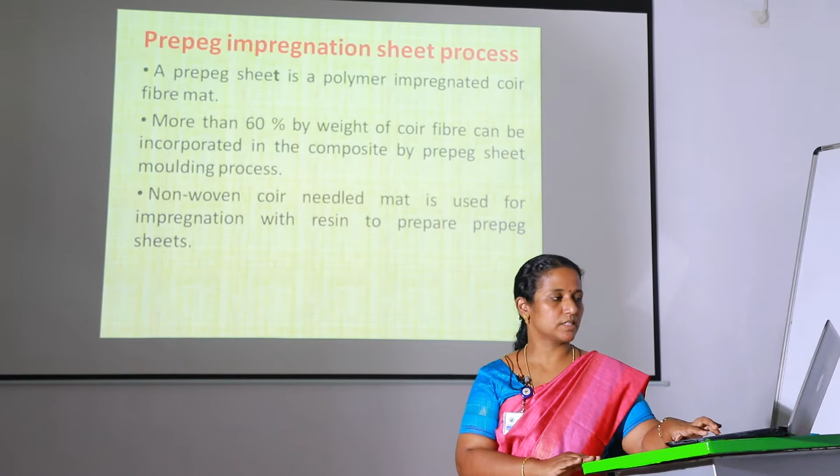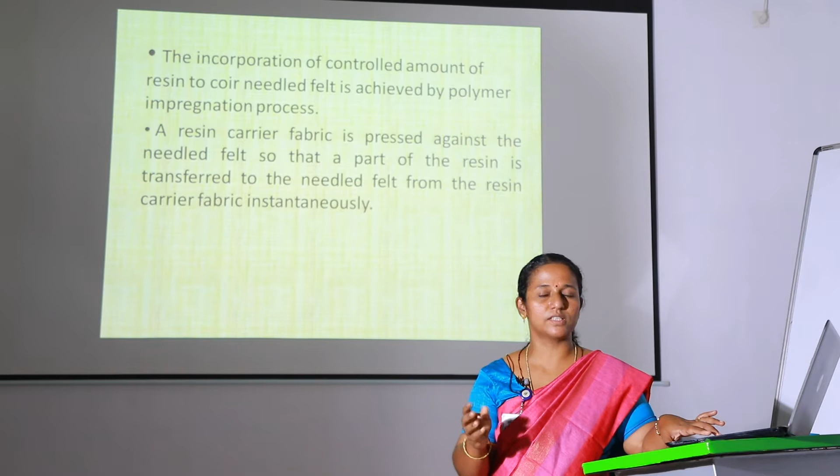By this technology, we will use only the required quantity of the resin for the wood production. That is the beauty of this prepreg impregnation technology. Only the required quantity of the resin will be laminated or coated onto the coir fabric.

The picture shows the prepreg impregnation process. We can see on the left hand side the coir needle felt coming in roll form, and these sheets are fed through 2 feed rollers and come to 2 sets of squeeze rollers. One set of the squeeze rollers is connected with a resin carrier fabric that is dipped in the resin bath. The resin will be kept in the resin bath.

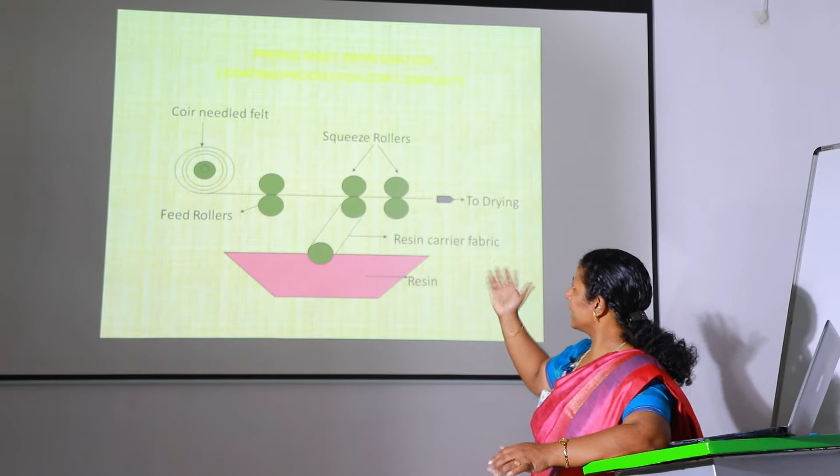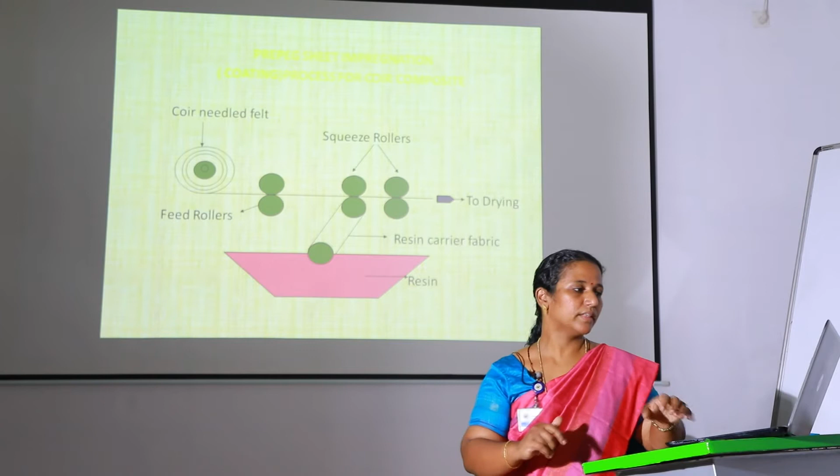This fabric will move through these rolls, and the required quantity of the resin will come with the resin carrier fabric, and this carrier fabric will come in contact with the coir needle felt while passing through the squeeze rollers, and the excess resin will be squeezed out. After this squeezing process, it will go to the pre-drying stage. Then the liquid part will be evaporated, and these sheets can be converted into the wood form.

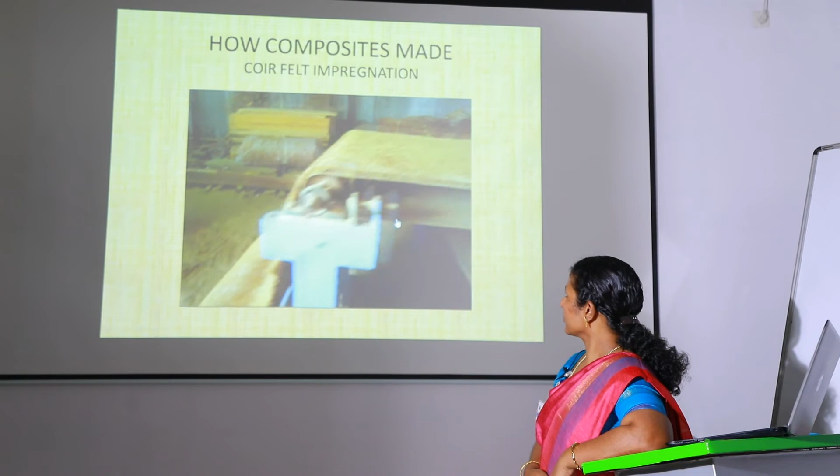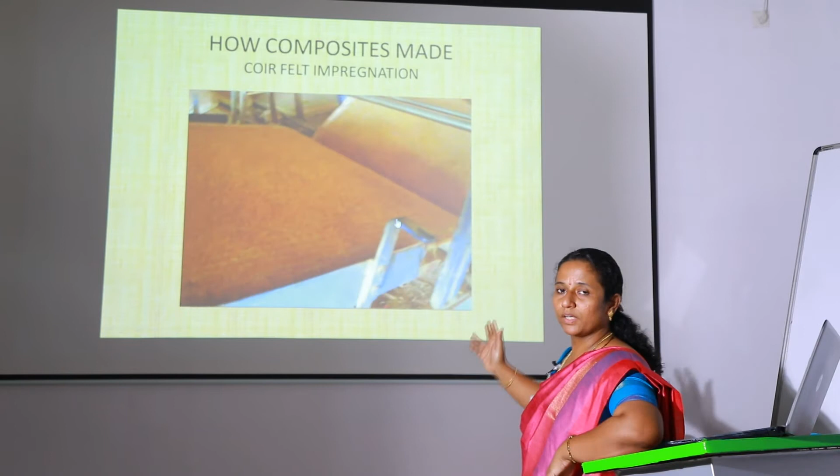The video shows the how composites made coir felt impregnation process. We can see that the needle felt materials are unrolled. It is passed between 2 squeeze rollers. It is connected with the carrier fabric. Now the coir needle felt has been coated with the required quantity of the phenol formaldehyde resin. It is the coated fabric.

Now we are moving to the hot pressing. The prepreg sheets are cut into the required size. Depending upon our requirements, we can cut them into the required size and stack them one over the other. The number of layers is decided by the requirement of thickness and density.

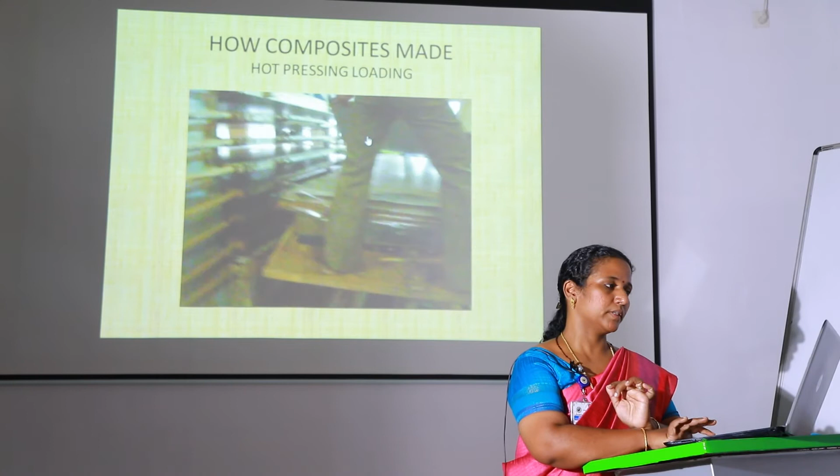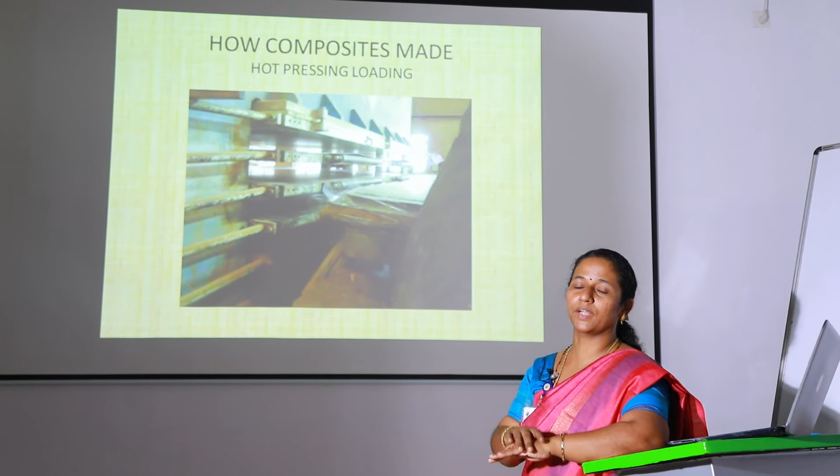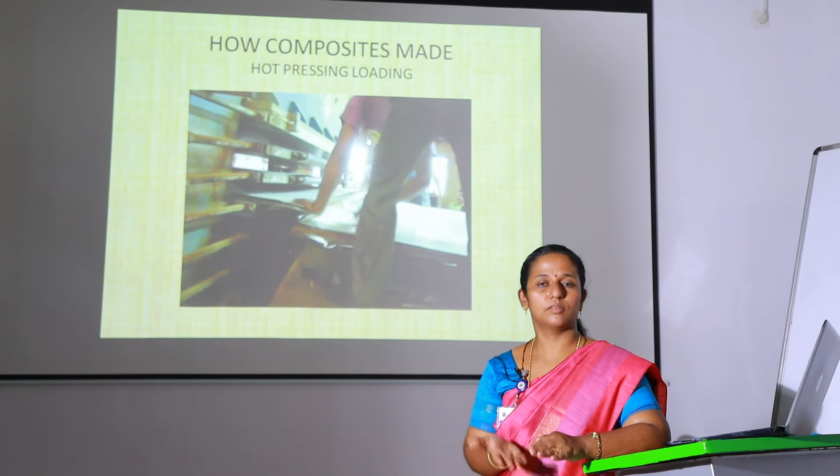Now it is the hot press loading method. The coated materials are loaded onto the hot press, a compression molding press. We are loading the required number of sheets. We can use a multiple daylight press for better economy.

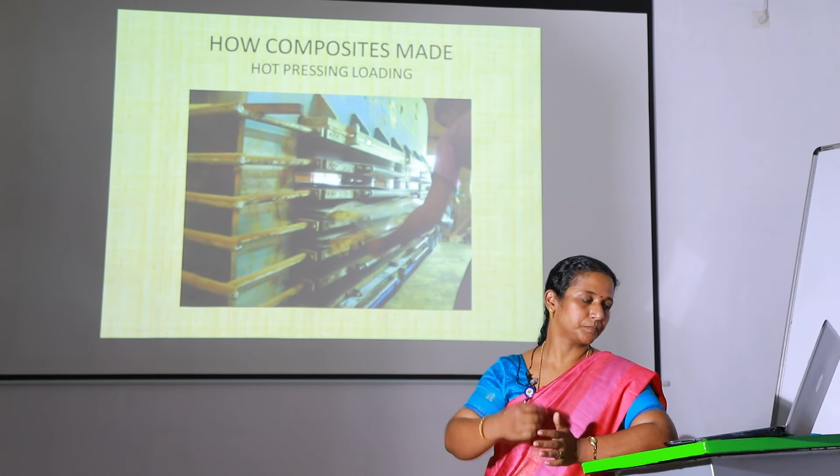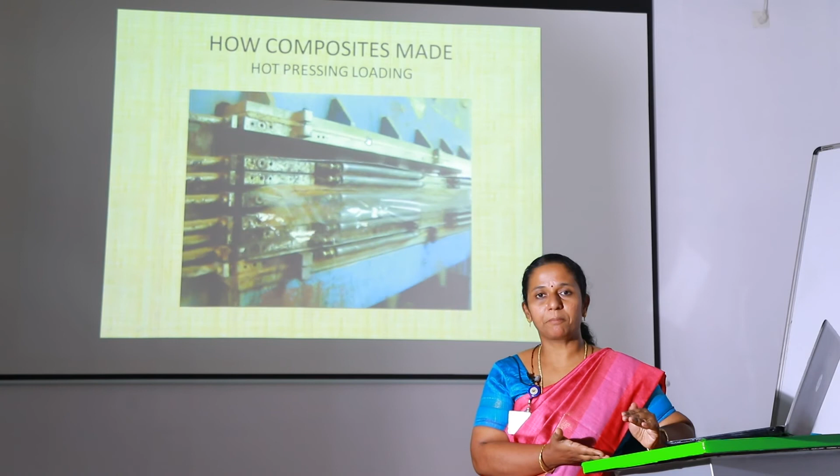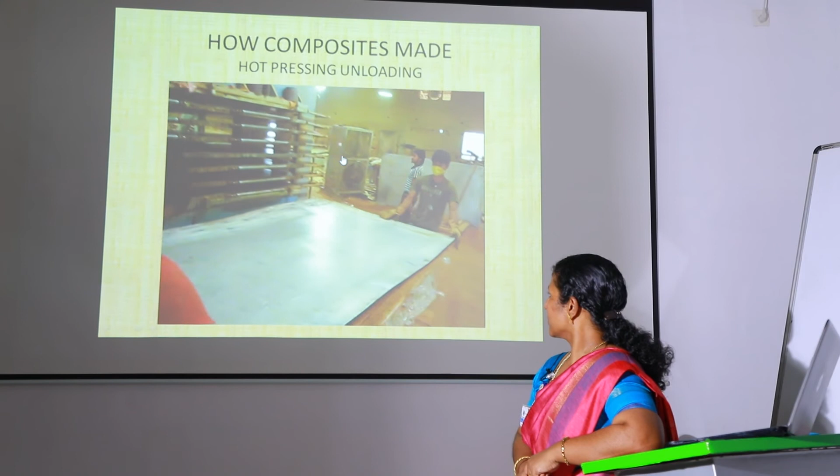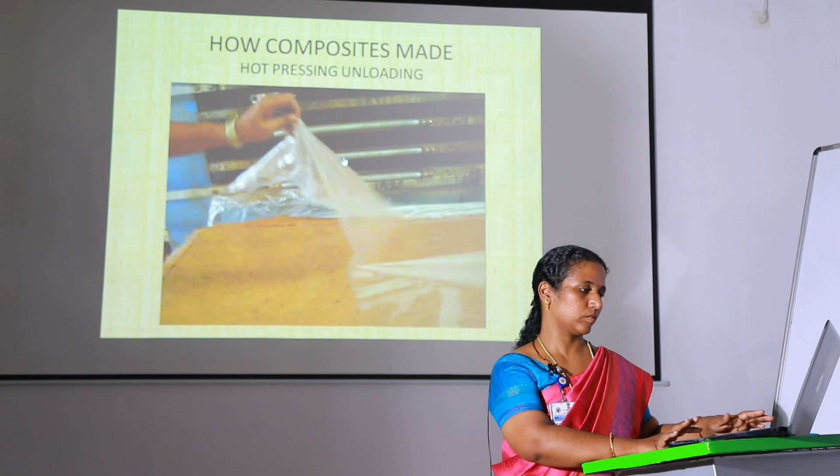We can control the thickness by providing spacers of the required thickness. Now the sheets are pressed under the required temperature and pressure to get the required sheets. The video shows the unloading from the press. After pressing, the sheets are taken out. This is our coir wood sheet.